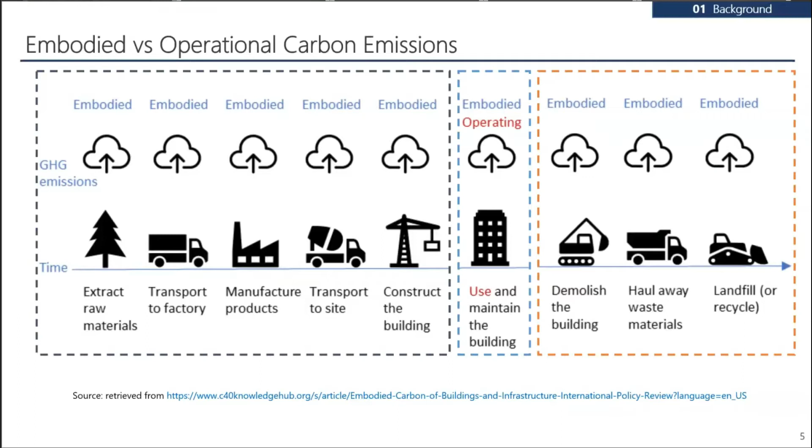Embodied emissions are calculated in terms of global warming potential, which is expressed as mass equivalent of CO2, or carbon dioxide.

Embodied emissions, along with various environmental impacts, are quantified by carrying out a whole building life cycle analysis through different life cycle stages, which include resource extraction, manufacturing, transportation, construction, operation, and demolition of the building.

Life cycle analysis also gives us results for other factors like eutrophication potential and ozone depletion, but for the purpose of this study we will only be looking at the global warming potential of building materials, construction techniques, and building energy systems.

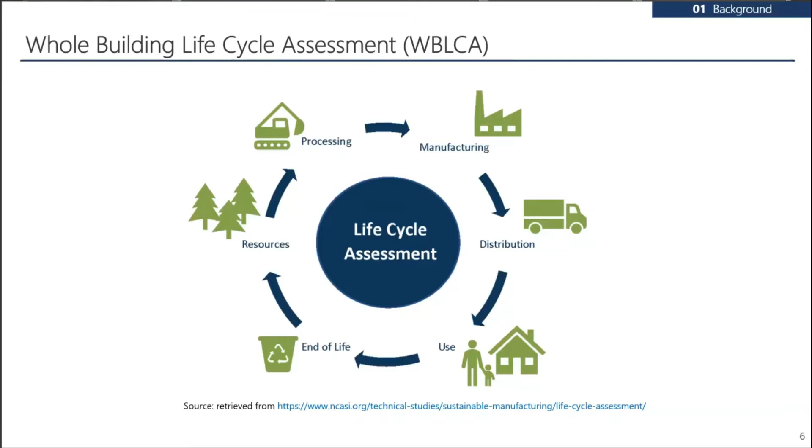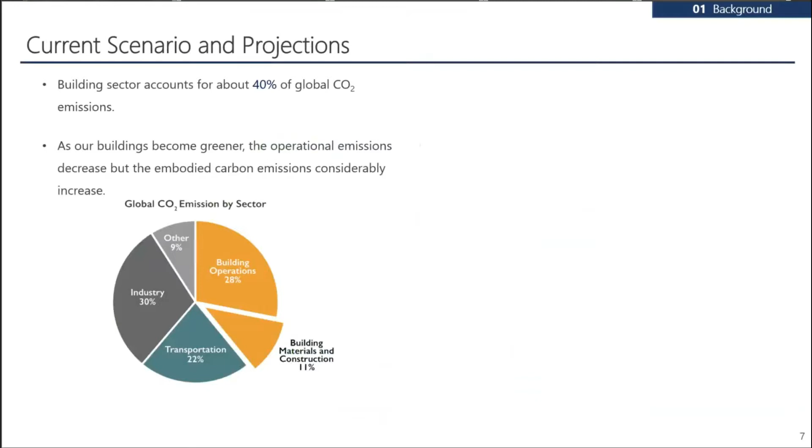As we know, the building sector accounts for almost 40% of total greenhouse gas emissions, out of which 28% come from building operations and the remaining 11% are embodied carbon emissions.

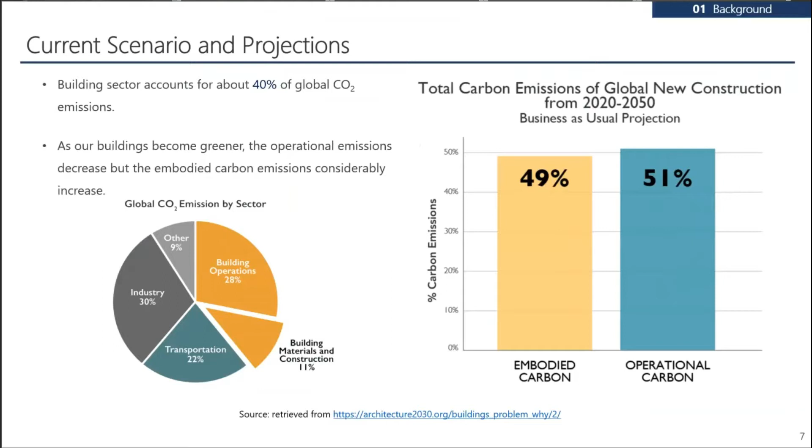By 2050, it is projected that embodied emissions are going to go up by 49%, and operational emissions will reduce down to 51%. A building is truly net zero only if both its embodied and operational emissions are zero.

This is precisely why we need to focus on the reduction of embodied carbon emissions while our buildings become more energy efficient. The graph here shows that overall carbon emissions can be reduced down to 70% if we build more efficiently.

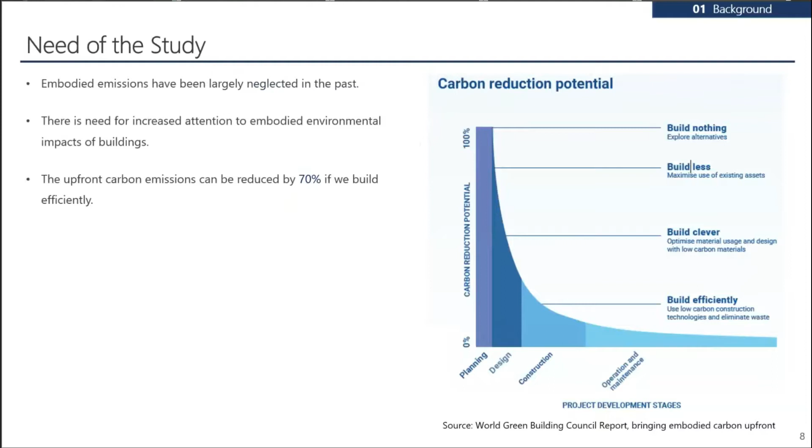This study examines the embodied emissions of building materials and mechanical systems that are broadly used to increase operational energy efficiency and reduce the operational GHG emissions of buildings.

The initial step to reduce embodied emissions is to identify carbon hotspots, that is, the materials or systems that contribute the most to a building's embodied emissions. This is done by carrying out a sensitivity analysis and conducting a whole building life cycle assessment.

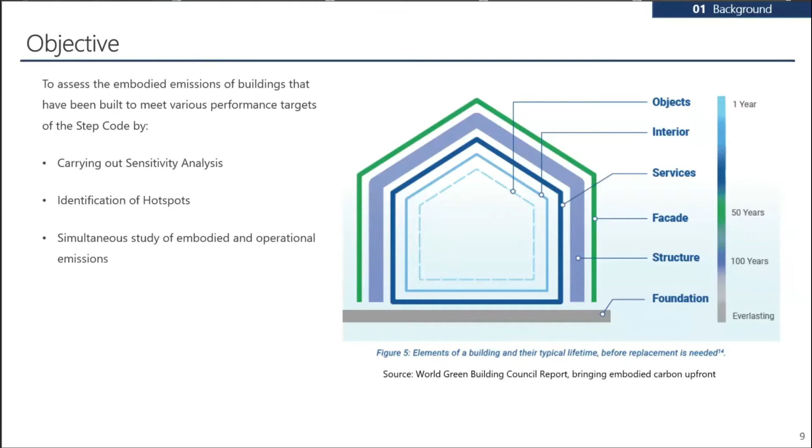To take a quick look at the BC Energy Step Code: it is a voluntary performance-based energy efficiency standard that provides an incremental approach to build higher energy efficient buildings that go beyond the requirements of the BC Building Code.

For Richmond, the current requirement for new single-family dwellings is compliance with Step 1 requirements, and the city plans to adopt Step 3 requirements for all single-family houses in 2020.

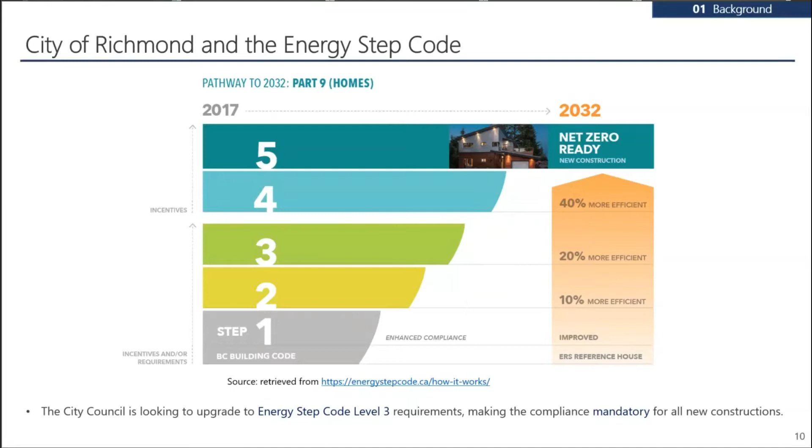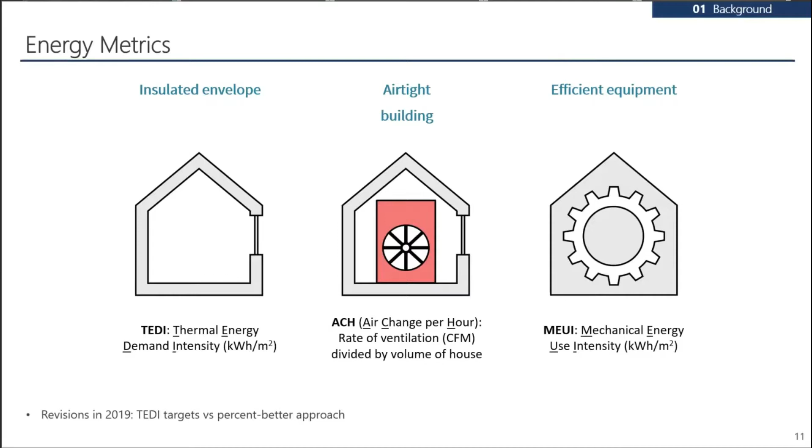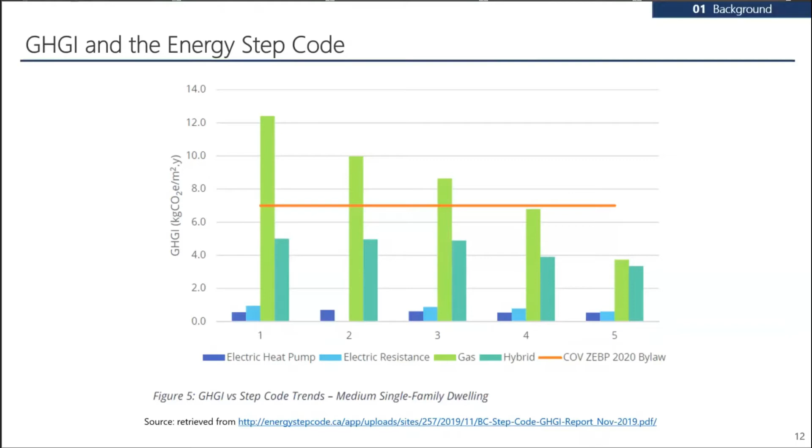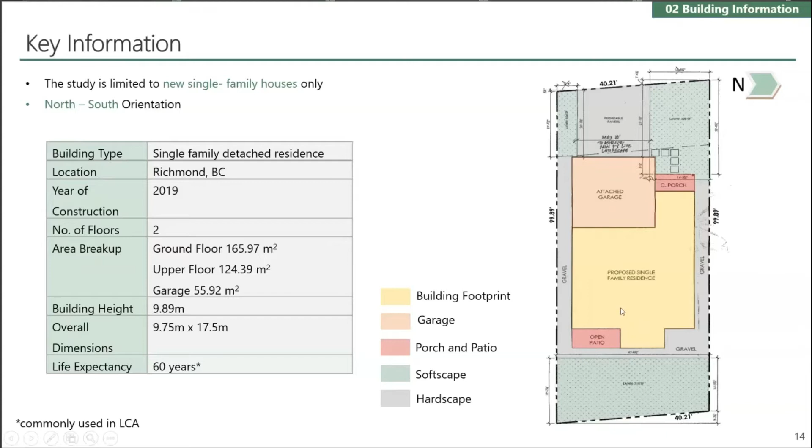Moving on to the building plans, we can see that the ground floor has a 2-car park garage, foyer, den, powder room and staircase nicely stacked up in one line, a double height living room, dining and kitchen. The important thing to note is the fenestration, which is maximum on the east and west sides of the building. On the upper floor, we have 4 bedrooms.

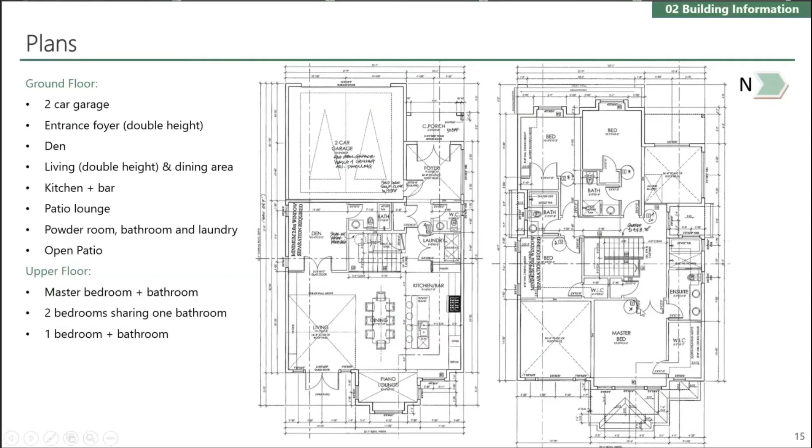The step 1 house has the following structural assemblies and insulation materials. The exterior walls are composed of 2 by 6 inch wood studs with R20 batt insulation. The truss roof has R40 batt insulation. There's a 4-inch concrete slab with 2.5-inch EPS insulation, and R31 batt insulation in the floor. The windows are double glazed, with a U value of 1.77 and a solar heat gain coefficient of 0.4. Major and minor energy upgrades were made to the insulation of these assemblies to suit the requirements of energy step code metrics.

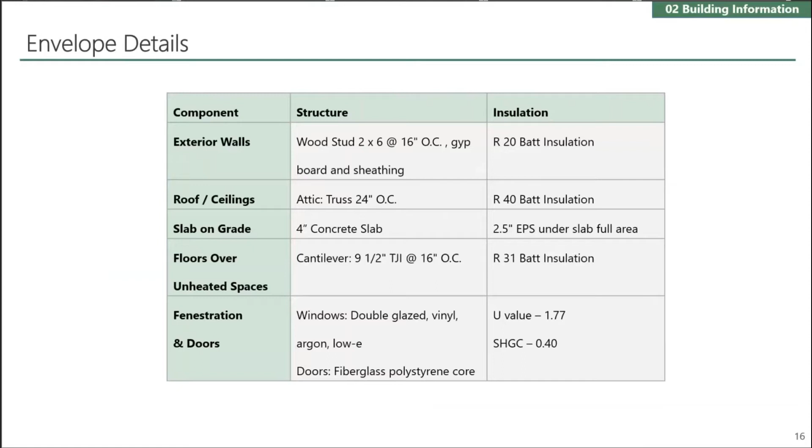Moving on to the methodology, we first carried out a literature study which included study of concepts like embodied and operational emissions, how whole building LCAs are carried out, types of insulation available in the market, and a thorough scan of similar studies conducted. This was followed by the building selection, explained in section 2, then an assessment of scope, defining system boundaries, establishing the scenarios to be used in the study, and determining what components would be included and excluded. The most important step was identifying types of calculations and determining the methods and software to carry out these calculations.

So we divided the calculations into 3 parts. Assessing embodied emissions for structure and insulation are calculated using whole building LCAs with the help of Athena Impact Estimator software. We primarily used the assembly method for calculating the global warming potential for structure only, and then standard EPD values were used for assessing the values of insulation, combining the structure and insulation values together into a hybrid method, which I will talk about more in detail.

For the embodied emissions of the mechanical system, an existing thesis was used, written by Barbara Rodriguez, which defines equations for global warming potential of equipment, distribution, and refrigeration. But for refrigeration, we used the City of Vancouver policy guidelines for green building rezoning. Lastly, to show compliance with the energy step code, the operational emissions were calculated from HOT 2000, an energy modeling software typically used for single-family residences and showing compliance with the step code. This was followed by modeling the 5 houses and carrying out analysis and providing final recommendations.

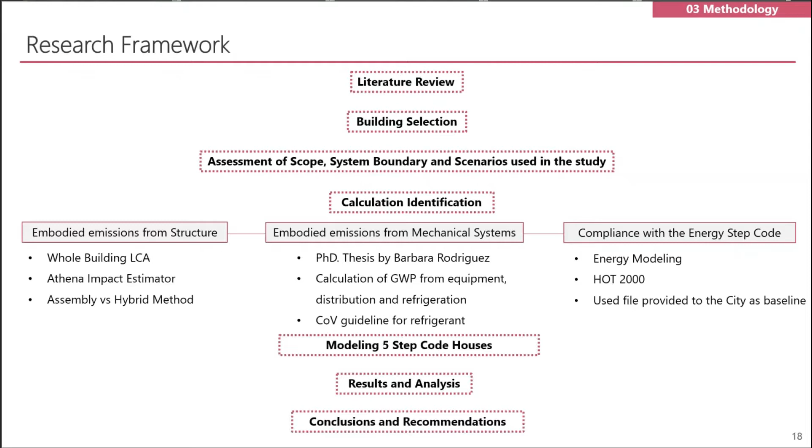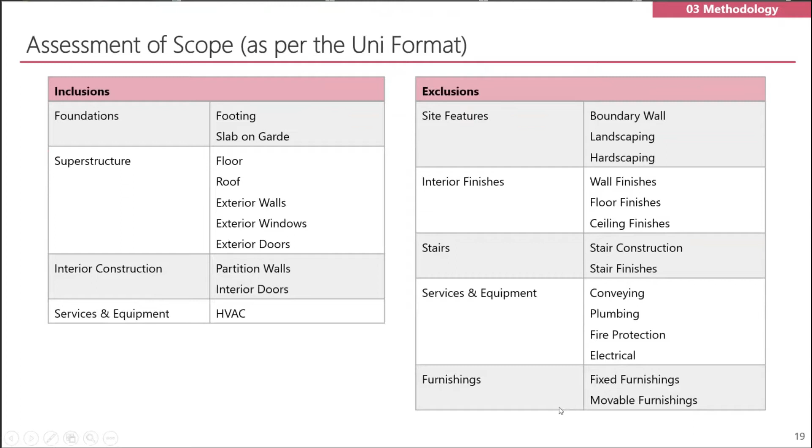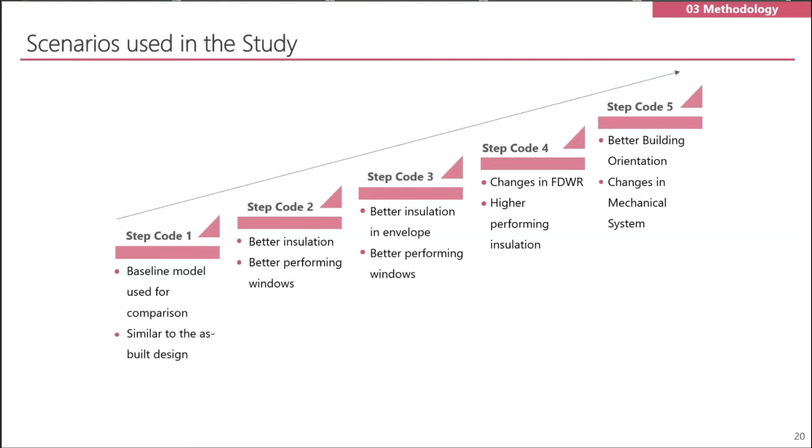These are the 5 cases used in this study. The existing building design is used as a baseline case, and minor energy upgrades were made to step 2 and 3 houses by changing the insulation or decreasing the U value of the glazing. Major upgrades were made to step 4 and 5 houses by changing the wall to window ratio, and using insulation with significantly higher R values.

These were the few challenges we faced while using Athena Impact Estimators: it had limited assembly and envelope options. Insulation values were available only in multiples of 10, so if we wanted to input insulation of R22 or R24, some assumption had to be made. There was no option to add U value for windows. Most importantly, through discussions with industry experts, we found that the global warming potential values for insulation in Athena's back-end calculations are hugely underestimated.

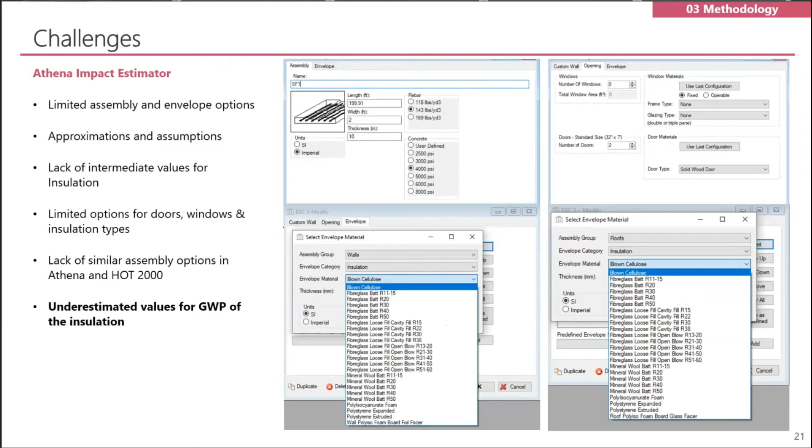To offset this disadvantage and get more appropriate results, we used a stripped-down model in Athena with no insulation to get the total global warming potential from structure only, and calculated the embodied emissions for insulation from industry EPDs and the table listed here. The two calculations were then combined to get the total embodied emissions for structure and insulation.

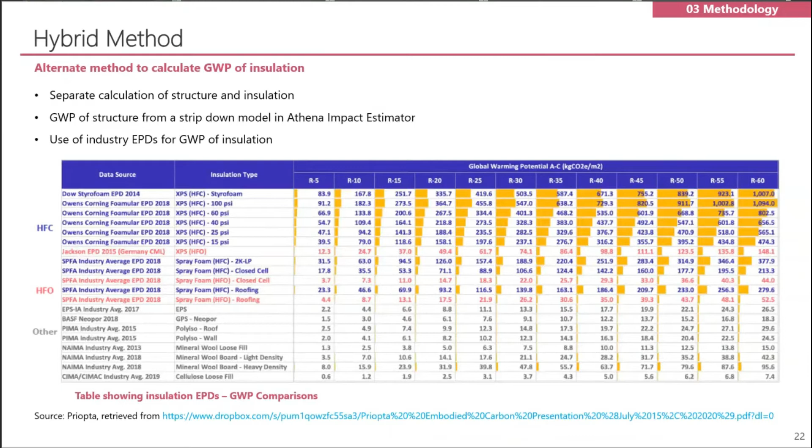Moving on to the embodied emission calculation for the mechanical system, it was again divided into 3 parts: global warming potential for equipment, distribution, and refrigerant. For equipment and distribution, we used an existing thesis by Barbara Rodriguez, which defines equations listing material quantities of equipment (MEQ), distribution (DMQ), and the embodied carbon content (ECC) from equipment and distribution.

For MEQ and DMQ, the weight of the heating and cooling equipment, and piping and ducting, were divided by the total heated floor area, and the ECC values were obtained from tables provided in the thesis for standard building type and packaged rooftop heat pump system, which was the closest approximation that could be made. These gave the final per square meter values for GWP of equipment and distribution.

For refrigerant, we used the equation provided in section 6.1 of the City of Vancouver Green Building Policy for Rezoning. Here, A is the symbol for number of years, GWPR is the global warming potential of the refrigerant, RC is the refrigerant charge in the system, L is the life of the system in years (15 years in this case), and A is the modeled floor area, that is the heated floor area. This equation assumes an annual leakage rate of 2% with 10% end of life leakage.

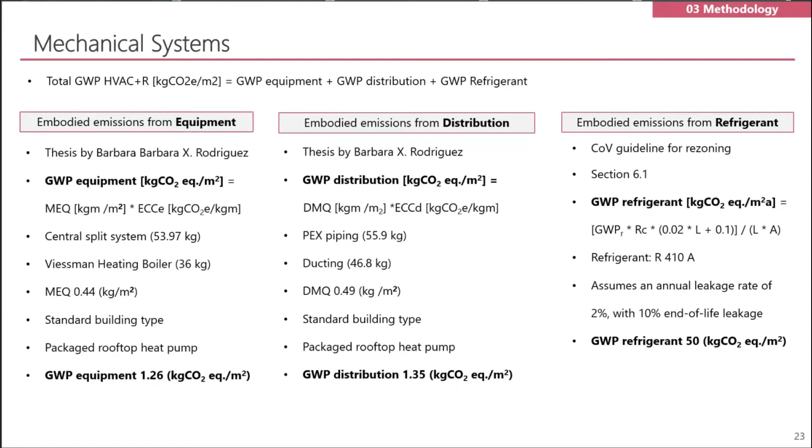All these values were calculated for total heated floor area of 204 square meters, and a lifespan of 60 years, which is the same as our LCA study. Let us now take a look at the different values obtained for each step code house.

This table compares the energy upgrades made to each step code house to comply with the energy metrics. The roof insulation was changed from R40 loose fill to R60 blown cellulose in step 3, 4, and 5 houses. The wall insulation was increased to a combination of R28 batt insulation with 2 inches XPS. Similarly, the insulation in slab on grade was changed from 2.5 inches to 3 inches XPS.

I want to point out that for space heating, cooling, and domestic hot water, the step 1 to 4 houses use two options to compare the difference in operational emissions. Option 1 uses a natural gas condensing heater plus a central split AC system for cooling, and a natural gas condensing boiler for domestic hot water. Option 2 has an air source heat pump for both space heating and cooling, and a natural gas condensing boiler for domestic hot water.

The requirements for step code 5 houses were only possible through a fully electric sourced heat pump for heating, cooling, and domestic hot water.

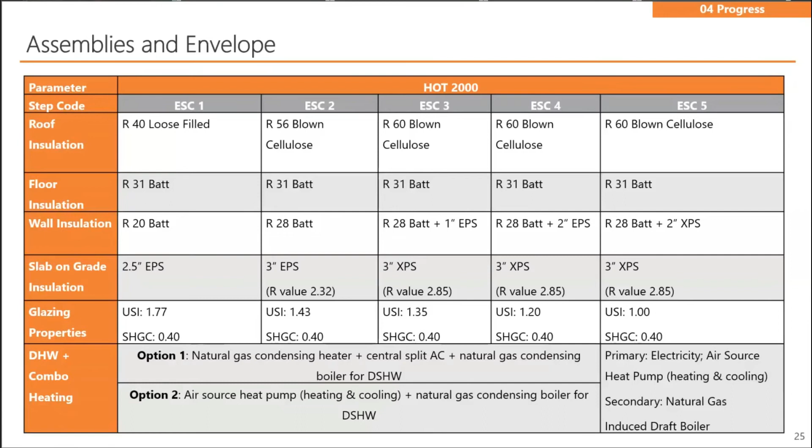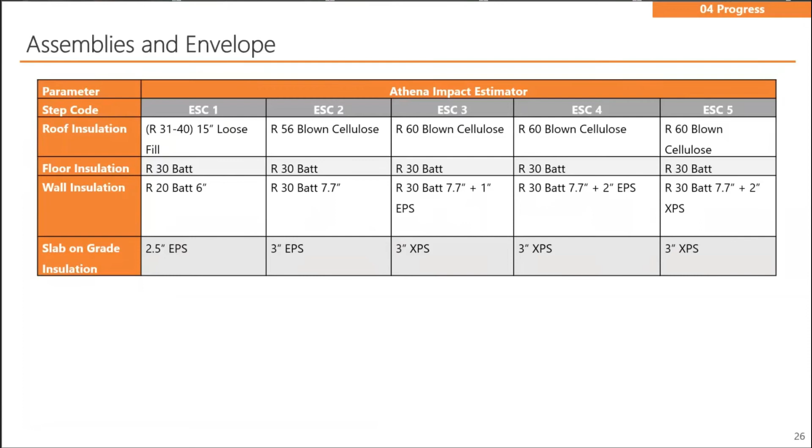Similarly, the insulation options were modeled in Athena for different step code houses, and a few approximations and assumptions had to be made based on the options available in Athena, which weren't the same as they were input in HOT 2000 software. These were the final values obtained from HOT 2000 for performance energy metrics.

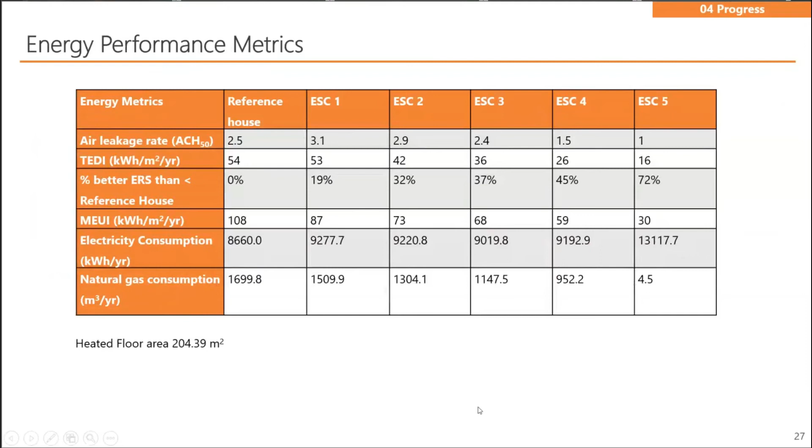Just notice the increase in electricity consumption and decrease in natural gas consumption from step 1 to step 5 houses, and we will discuss this more in the results. Now finally, let's take a look at the results.

To first compare the embodied emissions for structure and insulation from Athena Impact Estimator and the hybrid method, the values in yellow are from Athena Impact Estimator software, and the green are from the hybrid method. As we can see, the difference in values is more for higher step code houses, especially step code 3, 4, and 5, because these houses use significantly more XPS insulation, which is a highly carbon intensive insulation.

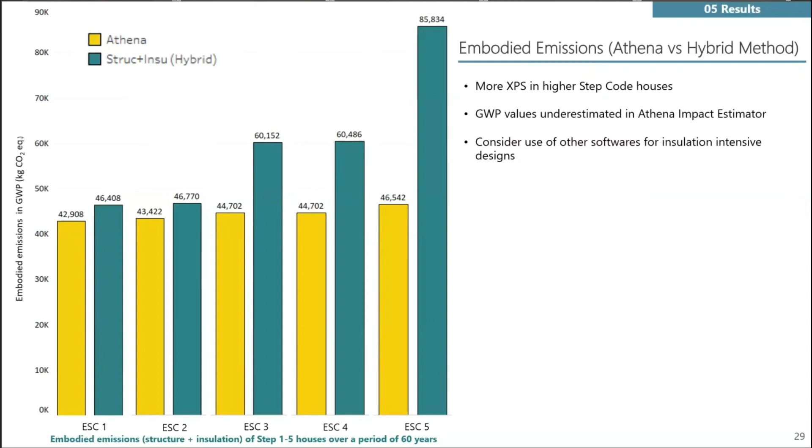Based on these results, it can be concluded that Athena significantly underestimates the global warming potential for insulation materials and may not be the best software choice to carry out highly precise analysis. So based on these results, the values obtained from the hybrid method were finally used for further analysis.

Now to take a look at the total embodied and operational emissions, in the option using air source heat pump, the shades of blue represent embodied emissions from structure, insulation, and mechanical system. The green values are the operational emissions in the option which uses air source heat pump as the primary source for heating and cooling.

Interestingly, the operational emissions for step 2, 3, and 4 houses are more or less the same. This is because the space heating is virtually decarbonized as we're using electricity as the primary fuel source. By changing the space heating load, the total emissions from water heating does not really change.

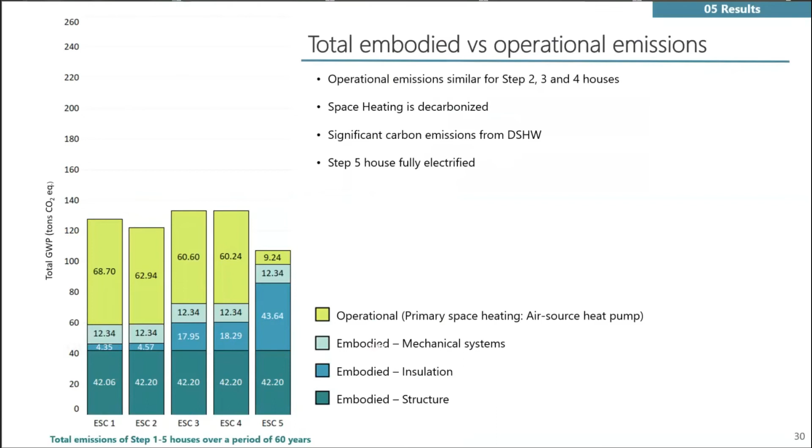So there's a difference of 51 tons CO2 in the operational emissions of step 4 and step 5 houses. This figure essentially comes from the global warming potential of space and water heating systems, which remains the same in all step 4 houses. And again, the step code 5 house was fully electrified.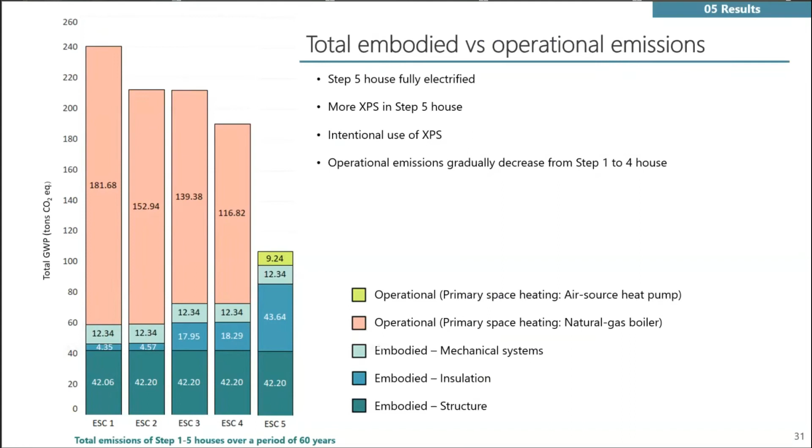For this study, the use of XPS for meeting the step code requirements was intentional to show the change in embodied emissions of insulation. As we know, XPS is a highly carbon intensive insulation which is more commonly used. Compliance could have been made using any other insulation as well, but the jump would not have been as drastic.

So this is a comparative analysis of the previous two graphs. Remember how we talked about the energy step code not guaranteeing a reduction in operational emissions? Here we can see there's a significant difference in the operational emissions of houses using air source heat pump versus natural gas boiler, where the difference is almost double.

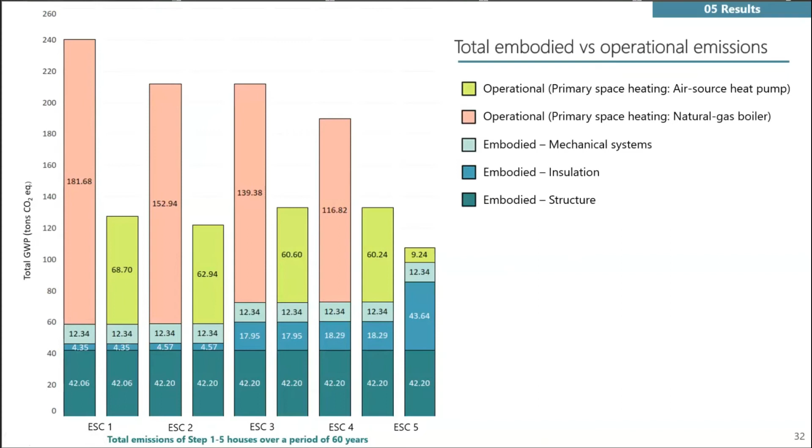This goes on to show that the requirements of the energy step code can be met through different energy systems, which will each have different operational emissions.

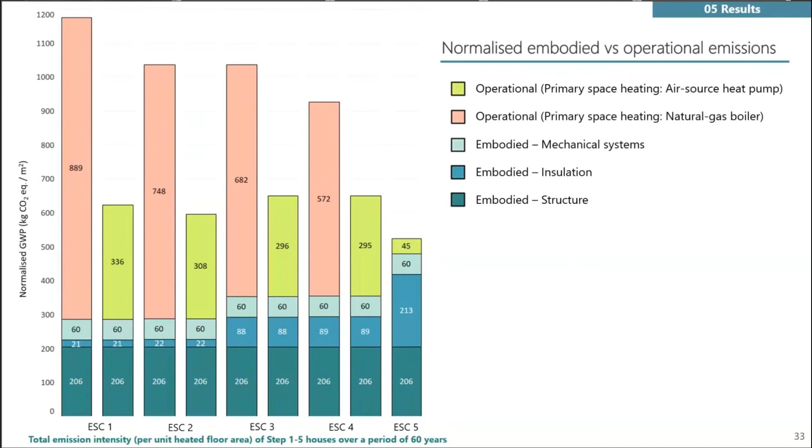Similarly, these are the results of total emissions on a normalized basis. By normalized, I mean we divided the total values by the heated floor area. The point of confusion here was whether to use the heated floor area or the total floor area, but to keep the basis of comparison the same, we used the heated floor area, and these were the final figures we got for embodied and operational emissions.

Moving on, this figure shows the contribution of the structure, insulation materials, and mechanical systems to the embodied emissions at the two ends of the energy step code ladder, that is the step 1 and step 5 house. Note that there's a significant increase in both the absolute and relative contribution of insulation materials to the embodied emissions when comparing the step 1 and step 5 houses.

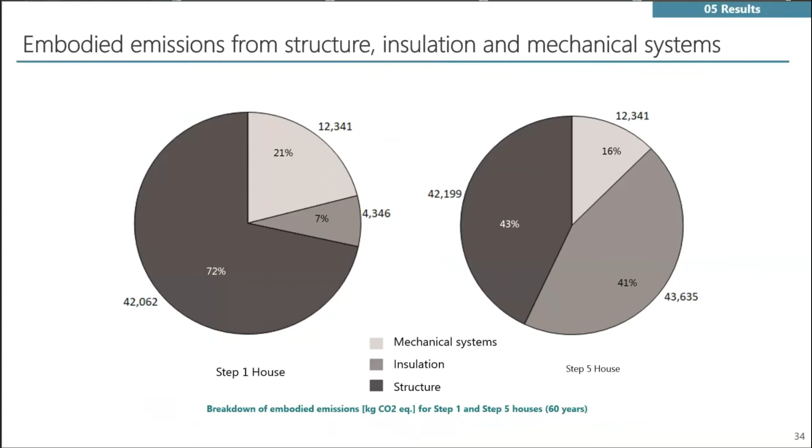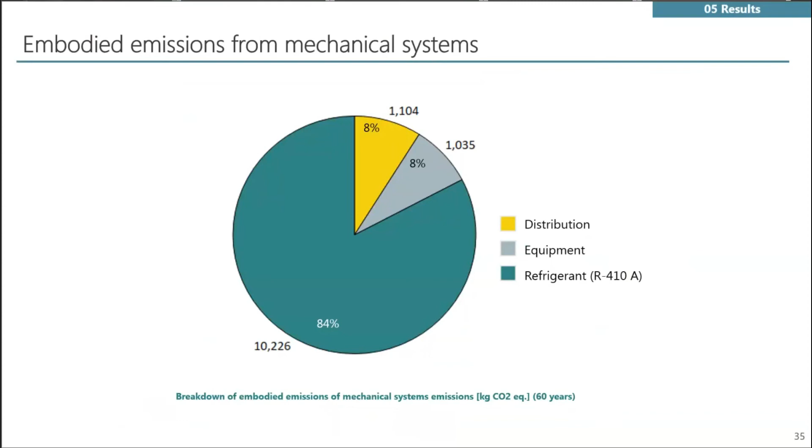This figure shows the percentage component of the embodied emissions of structure of the baseline building design and the different components that were used. These are the results we've obtained from Athena, and we've essentially left out beams, columns, and floor because there were no changes made to the insulation or structural assemblies of these components.

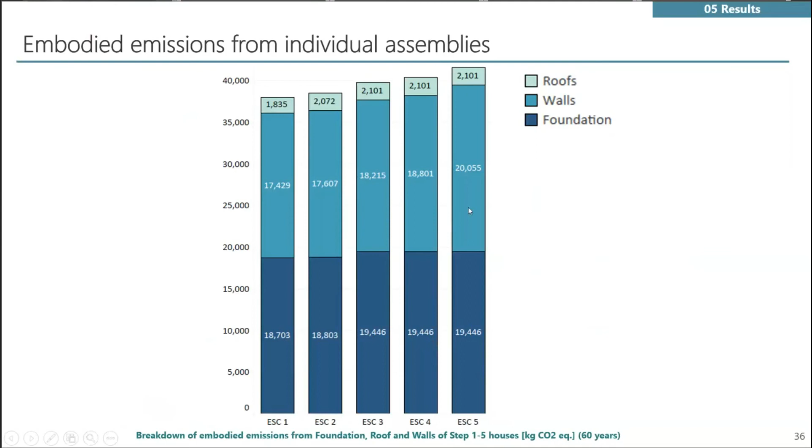We can see that there's a significant change in the embodied carbon of walls, while the change in foundation and roofs remains more or less the same - not much change there.

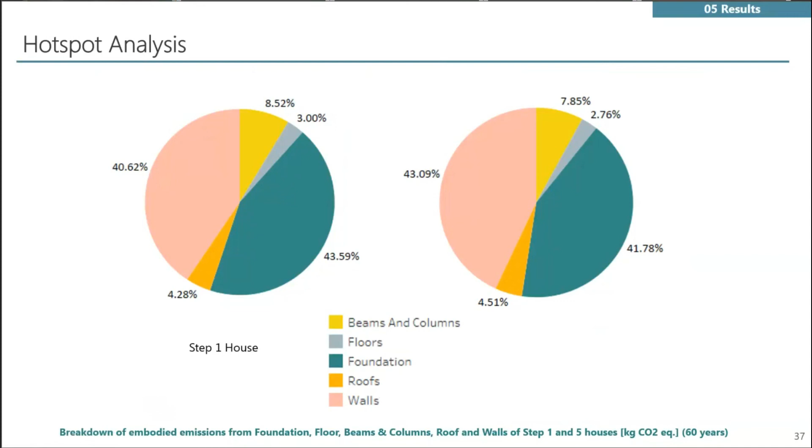Finally, we have this chart, which shows the comparative analysis of the contribution of each component towards the embodied carbon emission in step 1 and step 5 houses. We can see that the maximum contribution is from the foundation, about almost 43%, as foundation uses the maximum concrete. This is followed by walls, which is 40% in the step 1 house and 43% in the step 5 house. All the other components - beams, columns, roofs, and floors - remain significantly less and constant.

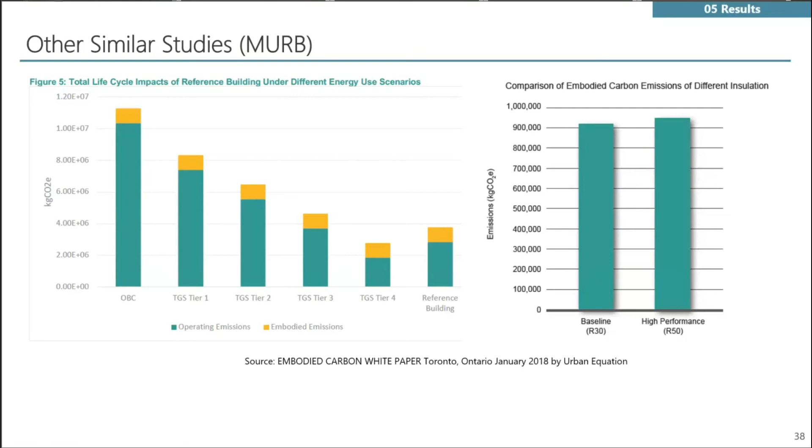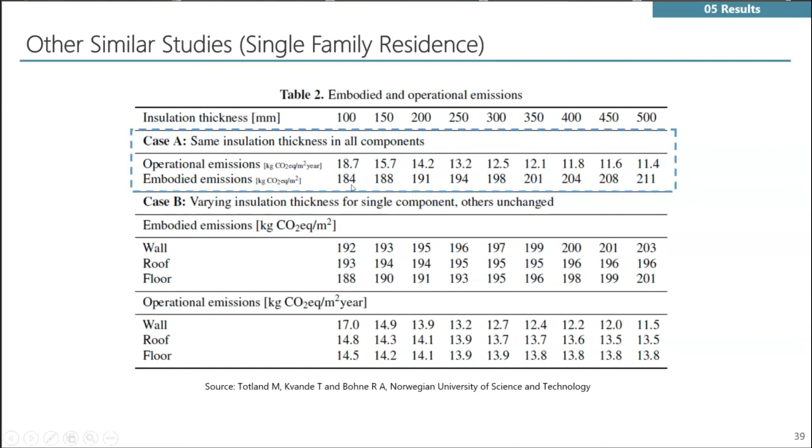Secondly, this was a study done by Totland at the Norwegian University of Science and Technology. What they essentially do here is keep the insulation type the same, but change the thickness of the insulation in all components. We can see that the embodied emissions change significantly from a thickness of 100mm to a thickness of 500mm.

Moving on to the conclusion, we saw that the Energy Step Code is not very effective in reducing the operational emissions of buildings, and it can have the unintended consequence of increasing the embodied emissions of buildings. Therefore, the relationship between the decrease in operational emissions and the increase in embodied emissions should be more carefully studied. A building is truly carbon neutral only when both its embodied and operational emissions have been eliminated.

As the operational emissions of a building are reduced, the contribution of embodied emissions becomes even more significant. In a step 5 single family dwelling, for instance, the embodied emissions can account for up to 90% of the total emissions, which is significantly high. Due to the increased amounts of insulation used, the embodied emissions of a step 5 house can be significantly higher than the embodied emissions of a comparable step 1 house.

This can be resolved by paying more attention to environmental product declarations and looking at them in the conceptual phase of the design. There should be more focus on the use of natural and low carbon insulation materials.

Looking at the mechanical systems, we saw that refrigerants are the primary source of embodied emissions of mechanical systems. With the increasing popularity of heat pumps, more attention needs to be paid to the embodied emissions of refrigerants.

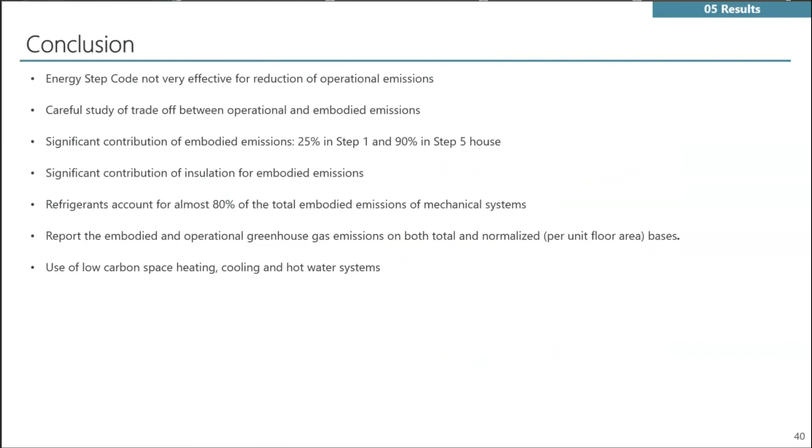Lastly, it is important to collect data on the embodied emissions of buildings, and such data should inform policymaking at the municipal, provincial, and federal levels. Therefore, it is useful to report the embodied emissions and operational greenhouse gas emissions on both total and per unit floor area basis. So these are the few conclusions we had from our study.